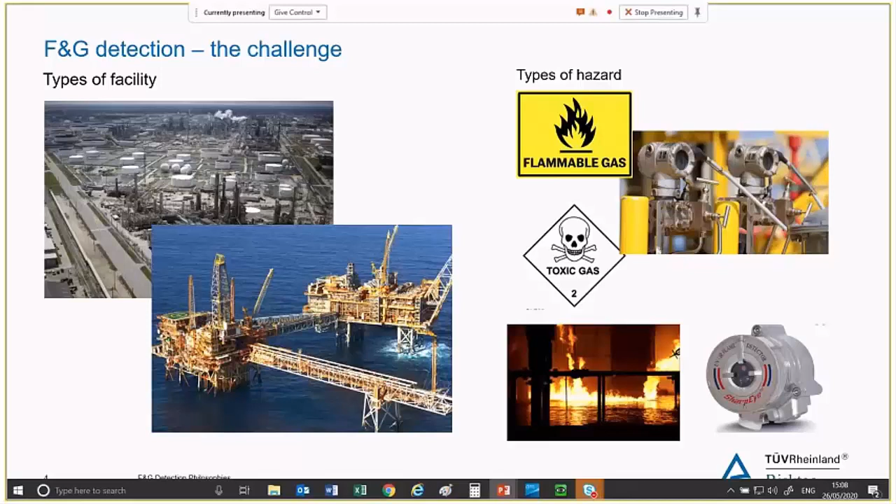And in fact, it must be accepted really that not every release can be detected. In fact, a review of the hydrocarbon release database for between 2001 and 2008 indicates that 69% of significant releases actually go undetected. So clearly there is much room for improvement here, and I think that this starts with development of a robust fire and gas detection philosophy that sets out the main objectives and the requirements of these systems.

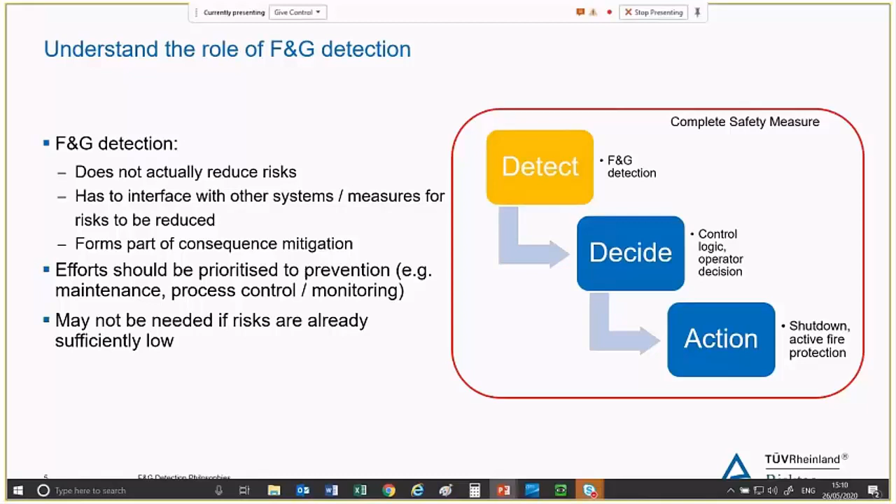And one further point to note as well is that the fire and gas detection system only serves to mitigate. It's only part of the consequence mitigation system, and therefore it might actually be more beneficial for our risk reduction efforts to be prioritised more towards preventative measures, such as more frequent maintenance and inspection, or better process monitoring and control systems. As we know, effort spent on these prevention measures has a much more direct correlation with risk reduction, and it may be that we've reduced the risks to a sufficient level such that there is an argument that fire and gas detection is not required at all, actually.

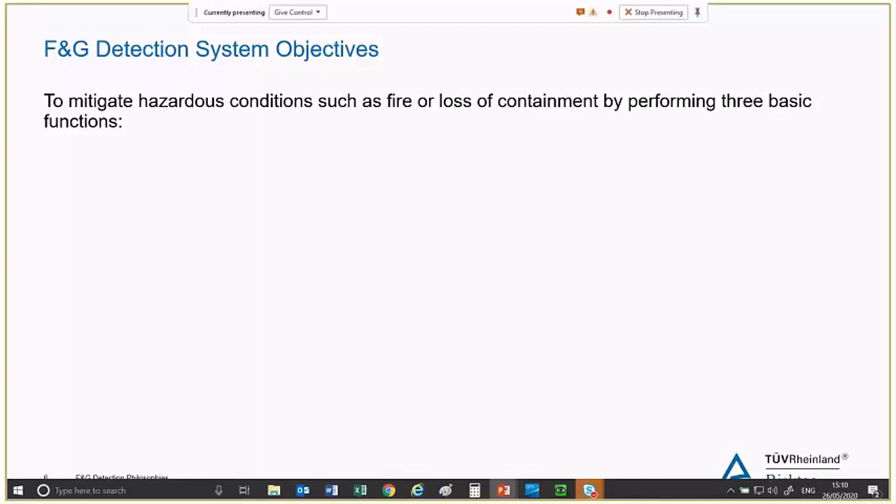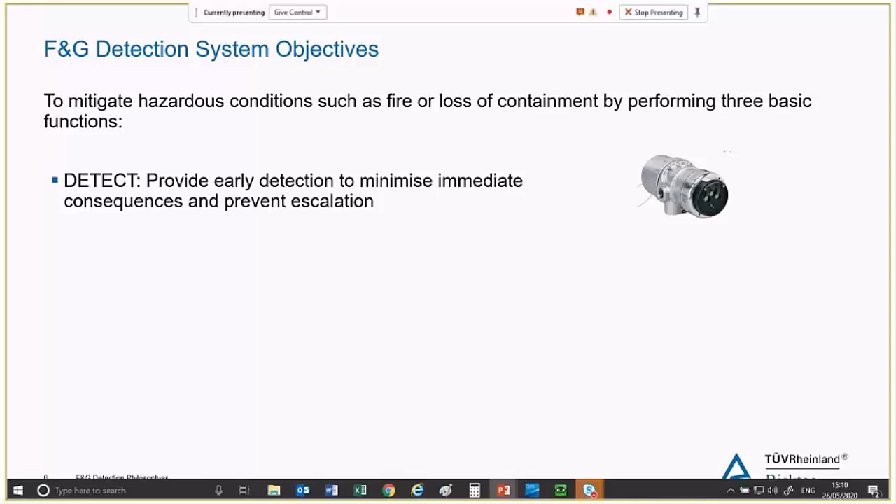So once we've come to the conclusion that fire and gas detection is needed for our facility, what are the main general objectives that we place on these systems? So obviously, it goes without saying, the system must detect, but it must detect and provide early indication, early detection to minimise consequences and prevent escalation. It must also go on then to alert operators, either the operators in a control room or field personnel located throughout the facility so that they can go on to take timely action and evacuate the area.

And this alert step must also provide sufficient information to the operator so they can take appropriate action. So it may be information in regards to the size of the hazard, the size of the fire, the size of the gas cloud, and the location of the hazard. And then finally, with this information, action must be initiated, and this action is the end element that actually serves to reduce the risks. So this action may be automatic if we want a quick response, or it may be manual from an operator at a control room, for example, who makes a decision on the given information.

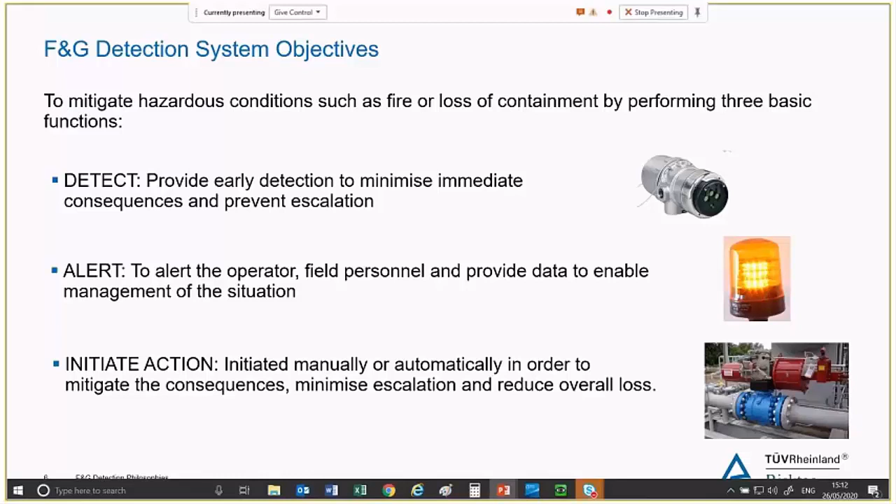Resultant actions may be things such as isolation and blowdown, electrical isolation if we want to minimise the potential for ignition of gas clouds, initiation of any active fire protection, for example deluge systems over vessels, and closure of dampers if we have detected, for example, gas in a ventilation system. So these are generic objectives, and obviously they must be tailored for different facilities or a specific project in hand.

Okay, so now we understand the limitations and key objectives of the fire and gas detection system, one of the key stages we must go through in development of a philosophy document. So understandably, there is a critical link between the requirements on the fire and gas detection system and the hazard and risk assessment. In order to understand the requirements for fire and gas detection, we must first also understand the level of risk posed by any sort of loss of containment scenario. And we must therefore appreciate the risks to assets, to personnel, and of course any environmental risks. Understanding these risks enables us to extend our general objectives to more specific detailed requirements that serve to reduce the risks for that facility or for a particular area of the facility.

And once we have defined the requirements coming out of our hazard assessment, we can then go on to choose the right technology that satisfies the requirements and is suitable for the hazard that is actually being detected. Very much in tandem with choosing the right technology, we must decide on a detector layout strategy that satisfies the requirements, and then coming out of this, propose our detector positions.

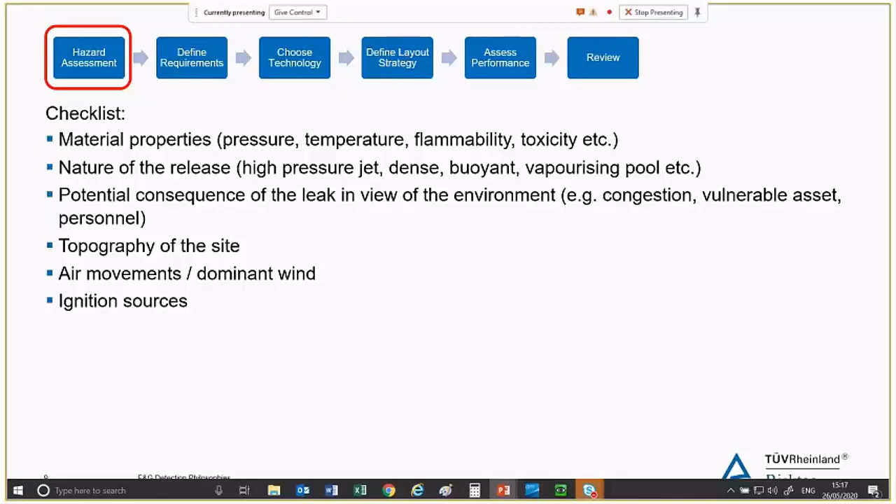In addition to the nature of the release, we need to consider the potential consequences of the leak in view of its environment, so the congestion levels and the explosion risks that higher congestion levels give rise to. Are there any vulnerable assets, or large hydrocarbon inventories, for example, or of course any personnel? The topography of the site may also be considered in this checklist. So, for example, are there any sumps into which gas may sink? We may also consider the dominant wind direction, and then review any ignition sources that may give rise to a fire hazard.

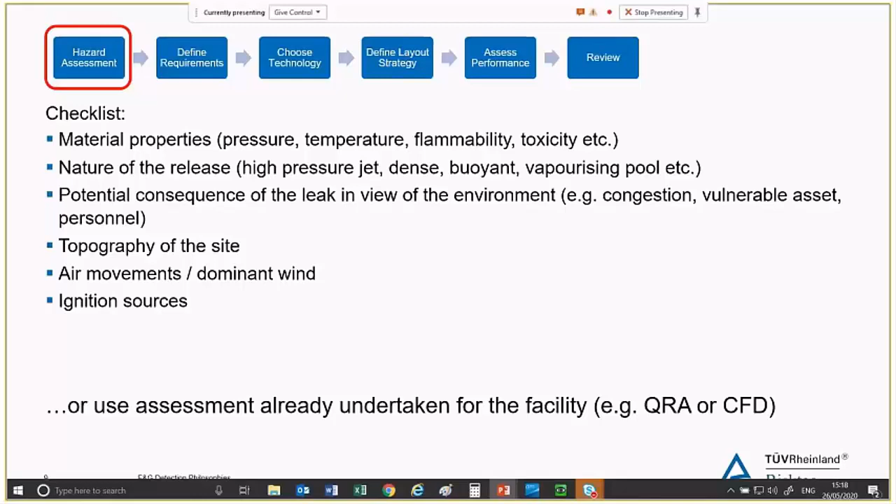So this could be done in the philosophy document, but for many projects in the oil and gas industry, we also perform other studies such as quantitative risk assessment and computational fluid dynamics. If these studies are available, then these can be used to gain more insights into the nature of the hazards.

Another requirement could be the specific alarm levels or sensitivity settings of the detectors. So, for example, for gas detection, lower alarm levels typically provide a quicker response, but are more susceptible to false alarms if we do choose to use a lower set point. Other requirements include the size of the hazard we're trying to detect, so a cloud volume or a specific fire size that's of concern or that may cause escalation.

Our coverage requirements, so that primarily drives the number and layout of our detectors. The intrinsic reliability of the system and its availability and maintainability. Any voting logic arrangements of systems that trigger automatic shutdown, typically that's initiated on 2 or more detectors. Any survivability requirements, and then crucially, as I've said previously, for fire and gas detection, any interface requirements. So by that I mean the requirements on its interface in terms of the resultant action that comes out once we have detected a hazard.

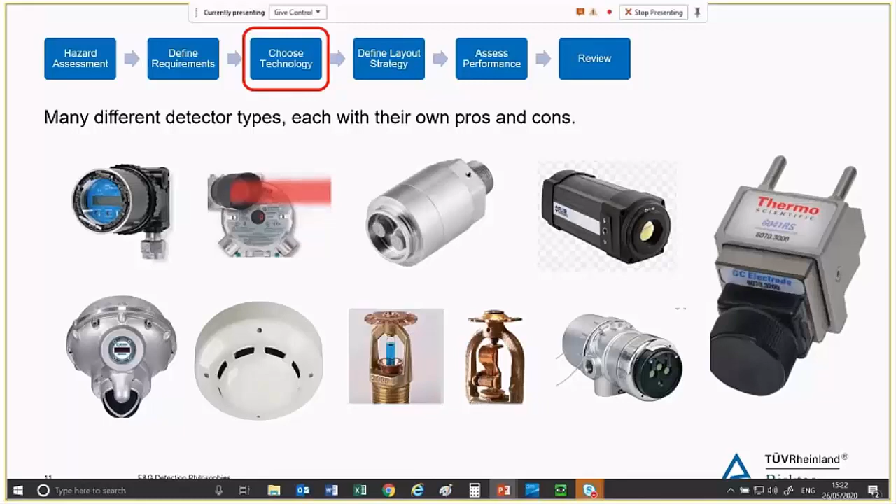And then there are many other factors, including the hazardous area certification. So for example, it must be appropriately certified for the area of operation. Otherwise, the detector itself then becomes a source of ignition for any flammable gas. So in parallel with detector selection, we must also choose a detector layout strategy. So this is actually crucial for a good fire and gas detection design.

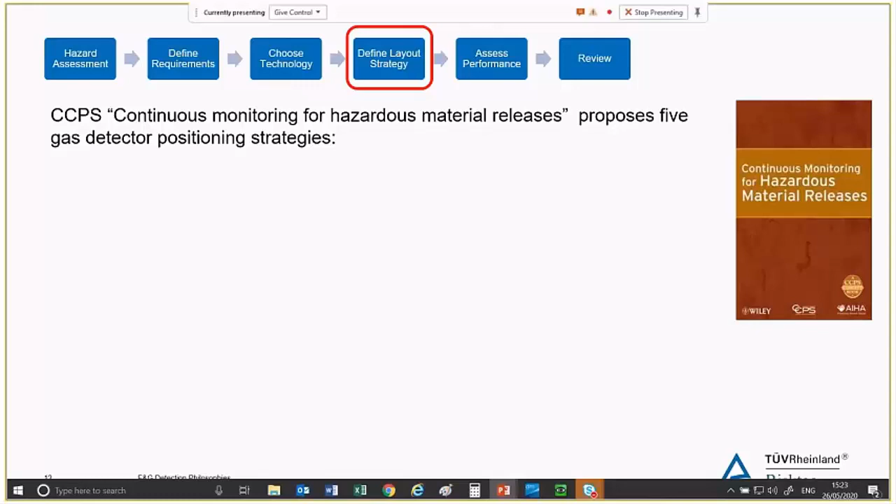And a great reference that goes through different detector layout strategies is this CCPS reference called Continuous Monitoring for Hazardous Material Releases. So in this book, there are 5 different layout strategies proposed. There is volumetric monitoring, which basically accepts the assertion that not all gas releases are going to be detected. And instead, this layout strategy focuses on providing a layout that prevents a damaging cloud from developing into a cloud of sufficient volume that could cause damaging explosion overpressure.

So in this layout, our detector spacing throughout the volume is determined by the explosion risks in the area. And for this, we can either use a simple rule set approach. So for example, highly congested areas with a blockage ratio of greater than 0.3, we may choose to place our detectors very closely together, and a commonly used approach is a spacing of 5 meters for highly congested volumes.

And if we want to do a more accurate assessment, we may choose to do CFD based explosion studies, and this will give us a more accurate damaging cloud size on which we would then base the layout of our detectors, the spacing of our detectors.

Another detection strategy is enclosure monitoring. This is quite simple, really. This is primarily aimed at detection for buildings, either the layout within the buildings or the external hazard to the buildings and the potential for ingress into the building.

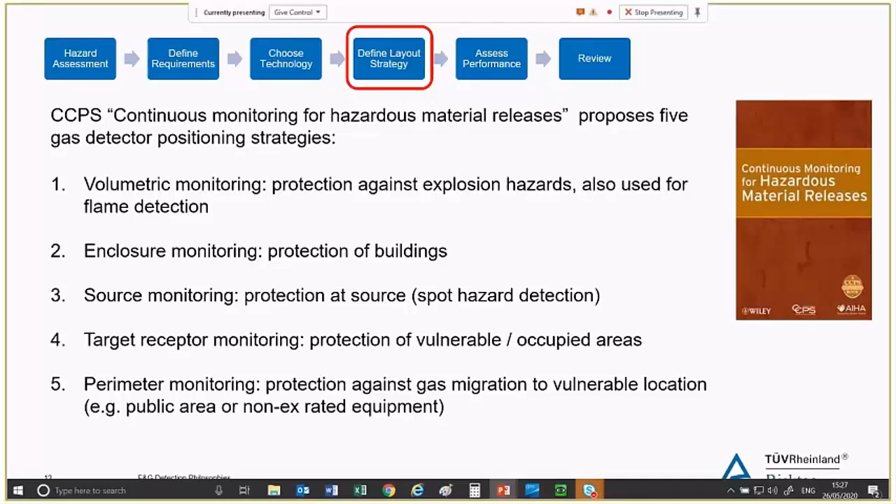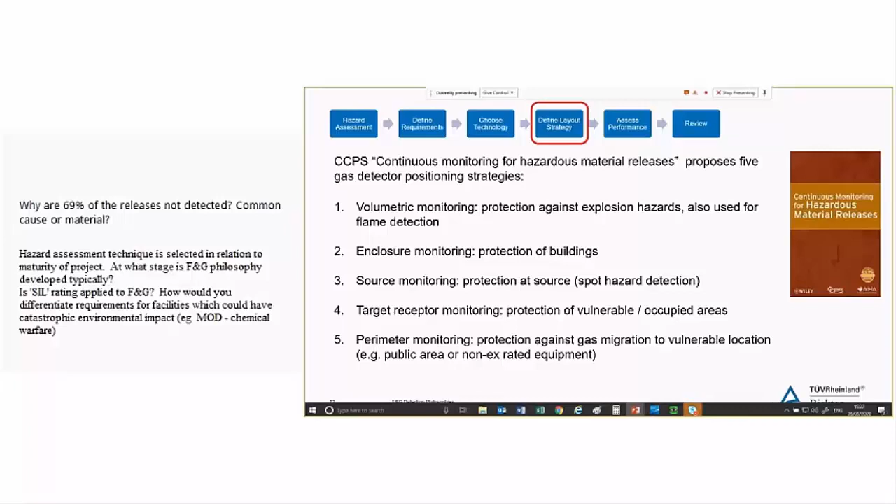Volumetric fire monitoring may be achieved by using flame detection. However, the level of congestion in the area may mean that flame detection just isn't appropriate. There just isn't enough visibility in the area for the detector, in which case we may choose to use heat detection. So there are just a couple of examples of how those two middle steps, choose technology and define layout strategy, go very much hand in hand with each other.

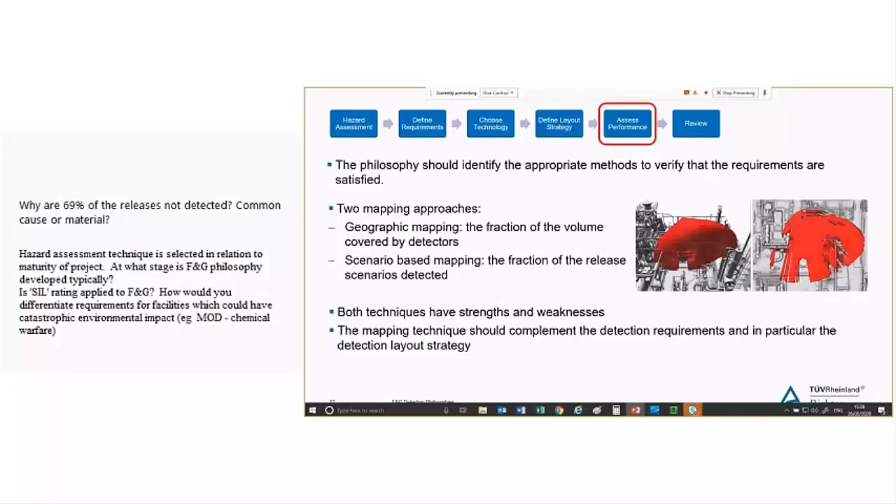Okay, so now we have the detection requirements, the chosen detector technology, our layout strategy, and from that our detector positions ready. We can then go on to assess how the detection system is performing. So there are quite a few methods for assessing detector performance, and I'm actually only going to cover one here, fire and gas mapping. So fire and gas mapping is a technique that's used to assess detector coverage performance.

Now there are two general definitions and approaches to assessing detector coverage. The first one being geographic mapping, where we determine the fraction of the area being monitored that is covered by the detection system. And then there is also scenario based mapping, where we look more at the releases and the fraction of releases that can be detected, considering the frequency and magnitude of these releases.

So both of these methods have their strengths and weaknesses, and it can actually lead to quite some heated debate as to which of these two is the best technique. My view is that the best depends on the area which we're assessing and the strategy chosen. It may be that the best technique is actually a combination of the two.

So both methods have their strengths and weaknesses, and the concern with scenario-based mapping is that the resultant layout can end up being tailored specifically to the releases assessed, and therefore to ensure a valid layout we must assess many release cases, and this generally has to be undertaken by CFD, which adds to study expense. The more cases we have to assess, the more expensive our study becomes.

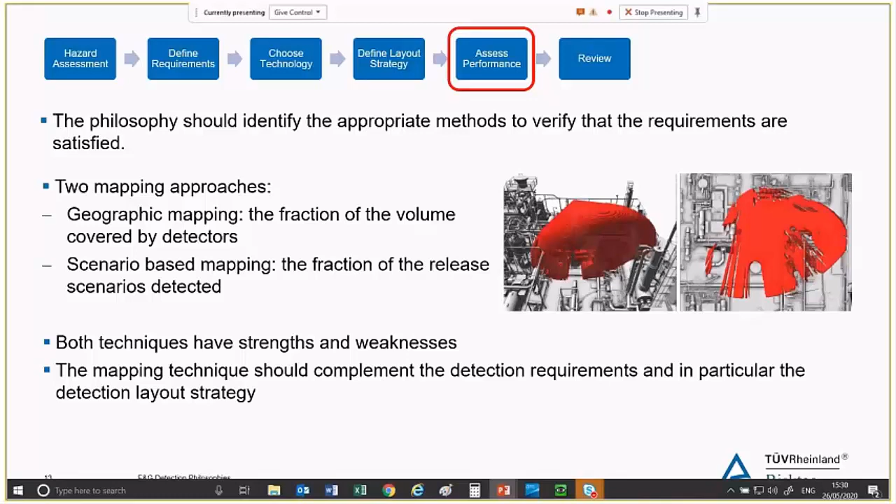So geographic mapping is best suited for monitoring where there is a significant explosion potential, where we're looking to ensure there's an appropriate density of detectors throughout a volume, a congested volume, for example. So in short, there is no right answer as to which is the best mapping technique, but the one chosen must satisfy the requirements and the layout strategy chosen.

So at Risktec, we do primarily get involved at the fire and gas mapping stage of projects, but all too often we do so without a philosophy in place. I'm not sure why in a lot of our studies we end up doing the mapping assessment without these preliminary steps performed. I don't know if it's the view that the fire and gas mapping will just simply provide the optimum solution, but this isn't true.

Fire and gas mapping is only an assessment, it only assesses the performance against the requirements, and therefore these initial steps must be undertaken before we get to the fire and gas mapping stage. So first we must define our strategy before going into the detailed analysis and number crunching activities.

So finally, the final step is throughout the design process and commissioning and operations, the fire and gas detection system must be routinely reviewed. These reviews may shed light on system weaknesses or a poor performing system, in which case it may be necessary to initiate a management of change and reassess or redesign the system. So coming out of this review step, as I said previously, we may well end up going right back to the first step and reassessing our hazards.

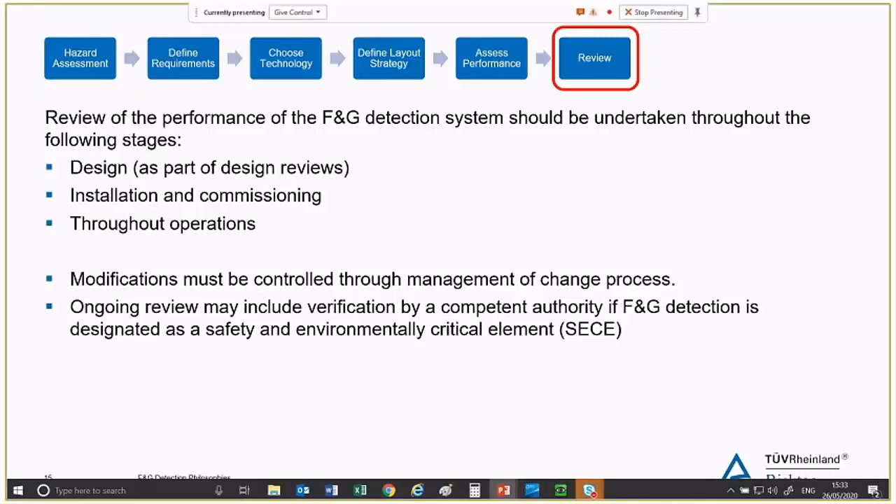Okay, so just to summarise what I've discussed here is that fire and gas detection system design is very challenging, particularly for outside process areas where there is a lack of guidance and almost too many options to the designer on how to solve the problem. And the variability of the hazard outcome as well, the number of potential outcomes for any single release scenario on a particular day, it varies greatly. And designing a system against these releases with the lack of guidance is a very challenging activity.

So to counteract these challenges, it's very important that the project or facility has a fire and gas detection philosophy in place, so there is an agreed basis on which to design the system. Having this in place ultimately ensures the risks are reduced in as effective a way as possible, and everyone can be confident that the fire and gas detection system has been well designed.

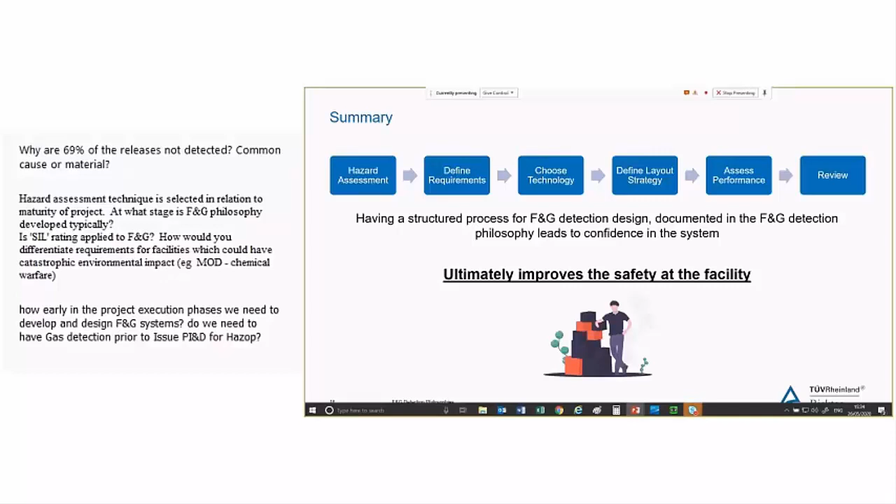And ultimately what we're aiming to do here by reviewing things, linking it to the hazard assessment and ensuring our requirements are tailored for the hazards at hand, ultimately what we're trying to do is improve the safety at our facilities.